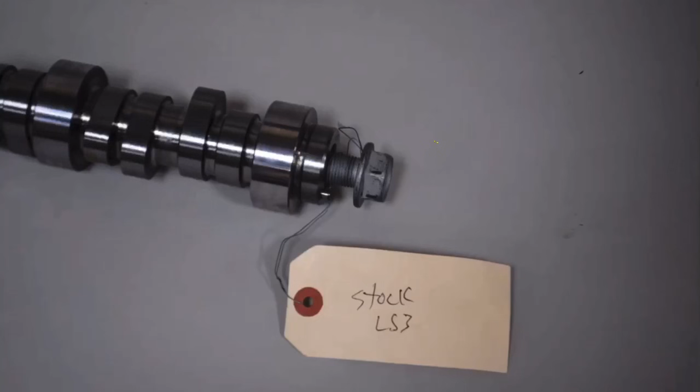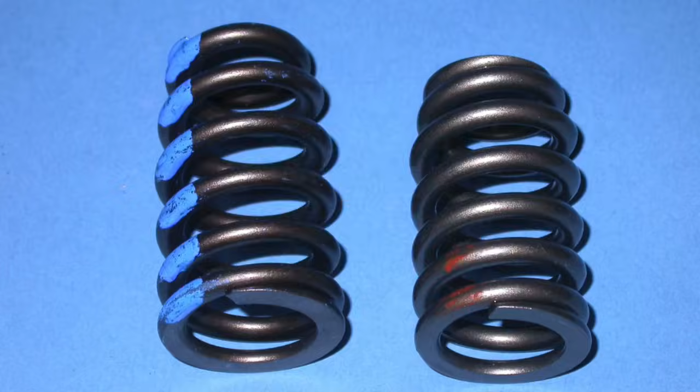Hey guys, Richard Holdener here. Where are my 6-liter fans? What 6-liter guy wants more power? I better see every one of those freaking hands up.

The question is, what camshaft should I use? Should I run a stock cam? Should I run a truck cam? Should I run a sloppy stage 2 or something even bigger? I know, let's ask Richard. He's probably tested it. In this video, I'm going to show you a bunch of different camshafts for your 6-liter

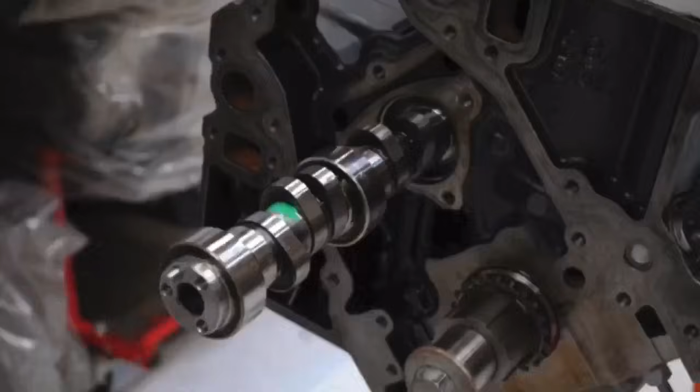so you can pick the best cam. I'm going to show you the stock cam, a bunch of truck cams, a sloppy stage 2 cam, the factory LS3 cam, and then a big comp cam to show you which kind of power curve you want for your 6-liter. But I'm also going to show you graphically from the dyno results why I'm so excited about getting my hands on a Truck Norris cam.

This video does not have that, but I'm going to show you why I'm so excited about that test. I've got some interesting comparisons here between some Brian Tooley stage 1, 2, and 3 truck cams and some factory cams and the sloppy cam and some other performance cams. And this is pretty good information. So let's take a look.

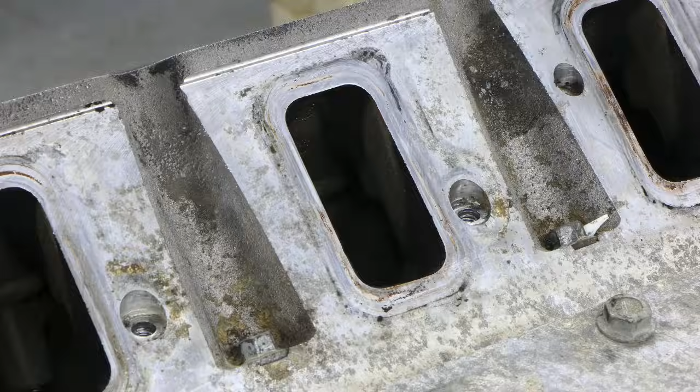We've got our 6-liter LY6, which is a rec port headed LY6. It originally came as a VVT motor, but we replaced that with a fixed 6-liter cam, and it was a later 6-liter, not the LM7 camshaft. We ran it with long tube headers, the Holley HP management system.

We ran it both with the LY6 truck intake manifold and the LS3, and we ran those comparisons of the two intake manifolds with multiple camshafts, and they basically made the same power every time we tested them, which was 4 or 5 different times. And so they made the same power. We ran, obviously, a manual throttle body and not the electronic drive-by-wire stuff.

We put springs on the heads because we would be running multiple camshafts on this thing, so we wanted to make sure we had valve spring to take care of the bigger cams that we would eventually run.

It's also worth noting that the Brian Tooley Racing Stage 1, 2, and 3 truck cams that we tested, these were the version 1, so this was long ago. They also came out later with a version 2, and then now they've even replaced that with a version 3, if you will, and also the Truck Norris cam, which I think would be the best combination of all of these, and I can't wait to actually test that one, but we're going to talk about that later on.

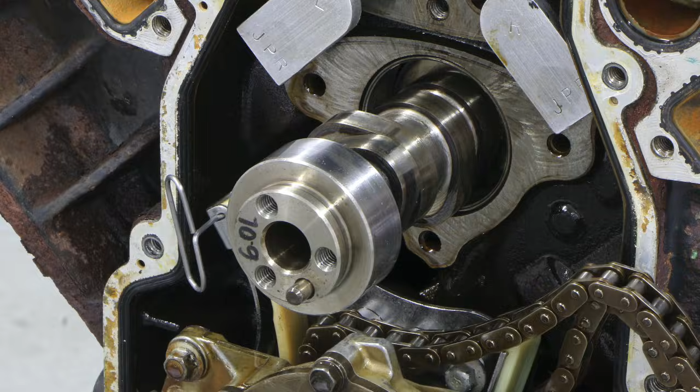Run with our stock 6-liter cam and the long tube headers, and obviously the thing was tuned, our LY6 6-liter produced 443 horsepower and 467 foot-pounds, and here's what happened when we installed our stage 1 truck cam. We picked up pretty good power, went up to 474. Torque was up to 480 foot-pounds.

The interesting thing is I want to show you a comparison between this stage 1 truck cam, which has a 527-535 lift split, a 206-212 degree duration split, and 114 degree lobe separation angle, and the factory LS3 camshaft, which is very, very close in specs. It has a 204-211 degree duration split, 551, so slightly more intake lift, and 525 exhaust lift, and 117 degree lobe separation angle. So let's take a look and see.

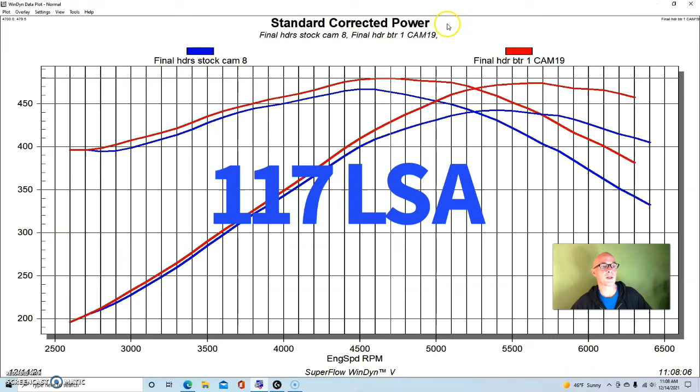So the little truck cam, even though it has similar specs to the factory LS3 cam, a tighter LSA, it makes a lot more average power. And we'll see this if you go up in the truck cams.

The stage 2 is kind of my favorite for this 6-liter combination because it makes almost the same power and torque as the stage 1, but makes a lot more peak power. So it mimics the stage 1 all the way up to 4,200. It ended up making, let's see here, 494 horsepower. Peak torque checked in, and we got a nice, starting to get a nice little torque plateau here.

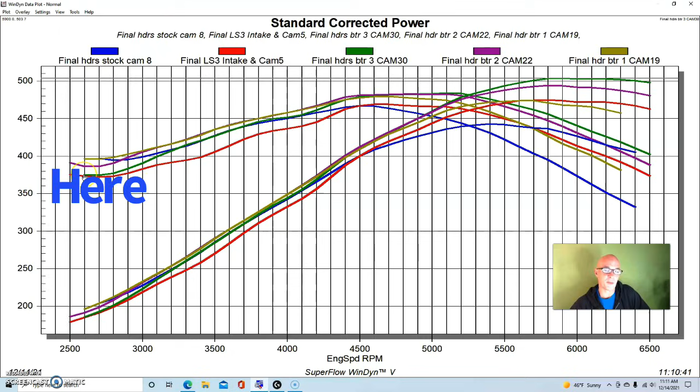It made the most peak power, 504 horsepower, but you can see it's starting to lose torque below 4,400 RPM or so. It's still never down as low as the LS3, except right here at 2,600 RPM. So it would be a better choice than a factory LS3, and it makes a lot more power, basically everywhere. But down low, they're going to kind of make the same power.

And again, these are the version 1 cams. The version 2 were better than these, and the new version is even better, and the Truck Norris cam probably is way better than all of these, I would imagine.

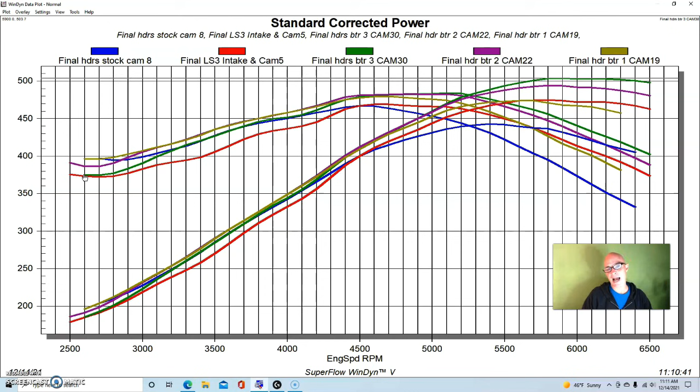So let's take a look now at some bigger cams. Having tested the earlier versions of the truck cam, I'll show you why I'm so excited about testing the Truck Norris cam and even the later versions of these truck cams. So this is our stage 2 truck cam on our 6-liter.

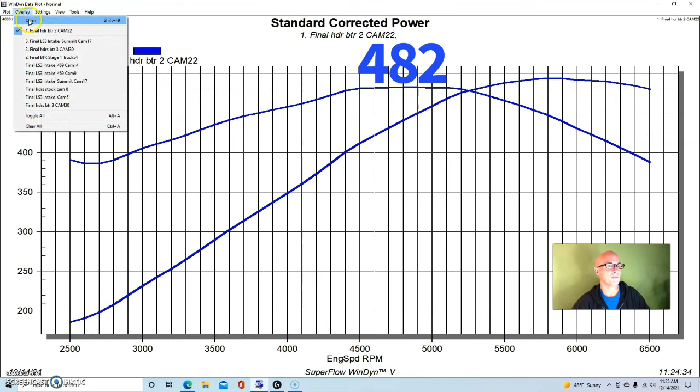We were at 494 horsepower, got a little torque plateau here, 482 foot-pounds. This was our stage 3 - you can see a little bit more peak power, but we traded power down low. And here is Matt Happel's favorite, the famous sloppy stage 2 cam.

And it makes a little bit more peak power. In fact, it makes more peak torque there and kind of shares torque production on the first part of the RPM range with the stage 2.

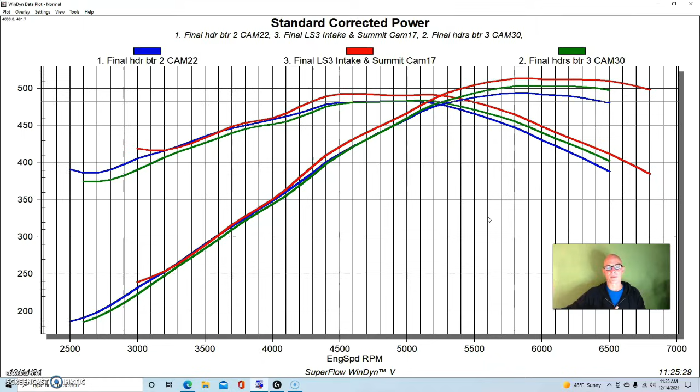And that's exactly why I wanted to test the Truck Norris cam, because remember, these are version 1 truck cams. So there's been a version 2 and a version 3, and now also there's this Truck Norris cam. I already know that the Truck Norris cam, having seen the test stuff that Brian did, is better than the version 3 stuff.

So it's going to make more low-speed power. So what I think will happen when we test the Truck Norris cam - it'll be interesting to compare it to the sloppy stage 2 maybe later on in a test. But what I think will happen is the Truck Norris cam is going to make more low-speed power than any of these. The thing I don't know, and the thing I'm excited about testing, is...

I don't know how much more power and how much more torque it's going to make than this sloppy cam, for instance, on the 6-liter. I don't think, given the specs of this thing - because this sloppy cam is a 228-230, and the Truck Norris cam has much lower duration specs, essentially a smaller cam - I don't know if it will ultimately make the same peak power as the bigger cam.

It'll be interesting to see where the crossover point is. I'm pretty confident it's going to make more power through a lot of the curve. I just don't know where the crossover point is.

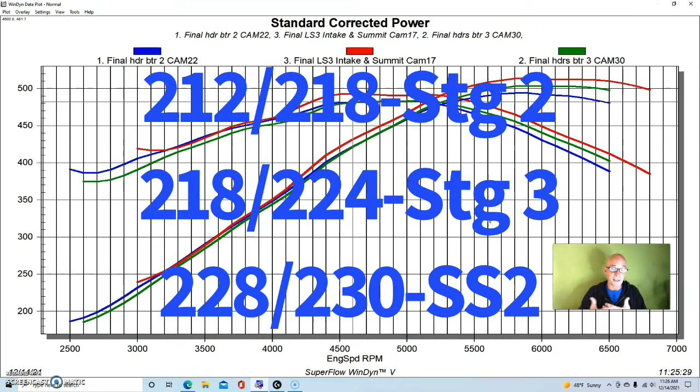I'm going to go ahead and put the specs up here for these different cams so you can see the different lift and duration specs. But the sloppy cam of all of these is definitely the biggest cam compared to the smaller stage 1 or stage 2 and stage 3 truck cams.

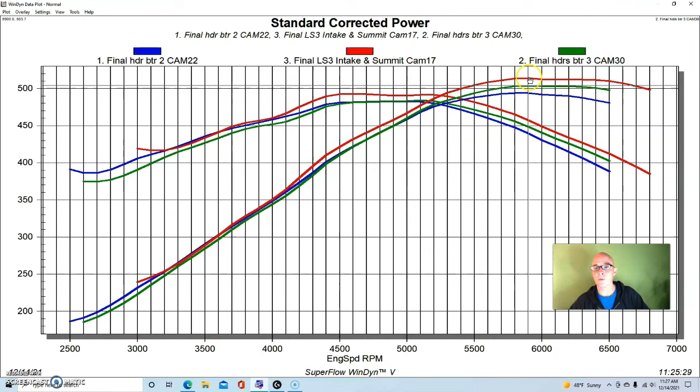But it's interesting that the stage 3 truck cam, even being 10 degrees less duration, 218 versus 228 for the sloppy cam, is within about 10 horsepower, I think. Let's see, we're at 504 versus 514. So yeah, right at about 10 horsepower. I'm pretty confident the new versions of the truck cam have that much more power, and like I said, the Truck Norris cam might be the best of all of those. So it'll be interesting to test.

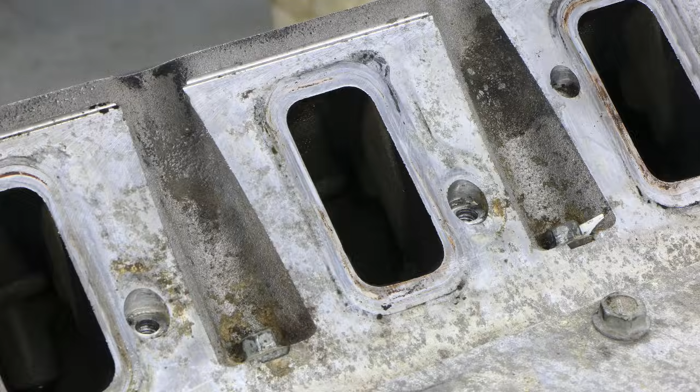But we're here also to take a look at other bigger cams. Since this is a 6-liter, it has lots of head flow. It's got the factory LS3 style rec port heads on it, an LS3 intake manifold, and long tube headers. So what it really needs to make power is more camshaft.

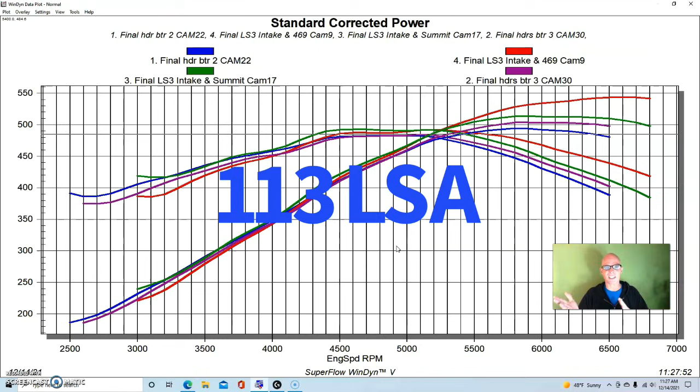Well, here's what happened when we put in the Comp 469 cam. Basically, that's a camshaft with a 231, 247 degree duration split. It's got .617, .624 lift and 113 degree lobe separation angle. But there are lots of cams in that range that are right at the limit of fitting the available piston to valve clearance. So the thing you need to be concerned with is that intake duration number, because that's what's going to hit first - the intake valve is definitely going to hit.

You have a lot of room on the exhaust side, but the intake valve is what gets close. A lot of guys think, well, how much lift can I run? It has nothing to do with the lift, almost nothing to do with the lift.

It's all the duration. Something in the 231, 232, 233, depending on where you put the lobe separation angle. The more you tighten up the LSA, the less piston to valve clearance you have, and the less duration you can run. You can juggle those two figures, but this is what happened when you run a fairly good sized cam that's getting up near the limit of the available piston to valve clearance on a 6-liter that has good head flow. We're looking at 543 horsepower.

So it's about 30 up on the sloppy stage 2, which is a 228 cam.

But it's only better from about 5,000 on up, which is an interesting dilemma for a lot of guys, because if you're drag racing this thing and you're running from 5,000 to 7,000, which would not be an unusual RPM range for you to run your LS in going down the drag strip, the bigger cam is definitely going to win the race. It's going to make more power, more average power in that RPM range, and it's just going to be faster.

But if you look down below that, the smaller 228 sloppy cam actually makes more torque, not by a ton, but by some, compared to the bigger, almost-not-gonna-fit kind of cam. We see a difference of 399 to 420, so 20 to 25 extra foot-pounds down low for the smaller cam.

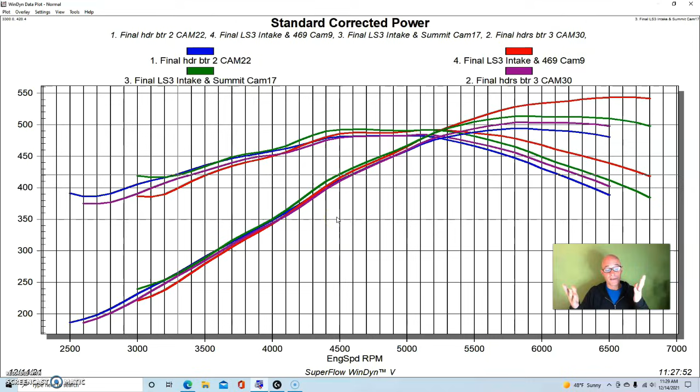And that's something we see a lot. You trade power up top, where you get big power gains on the big cam, you also get a low speed power loss. Let's get to our conclusion.

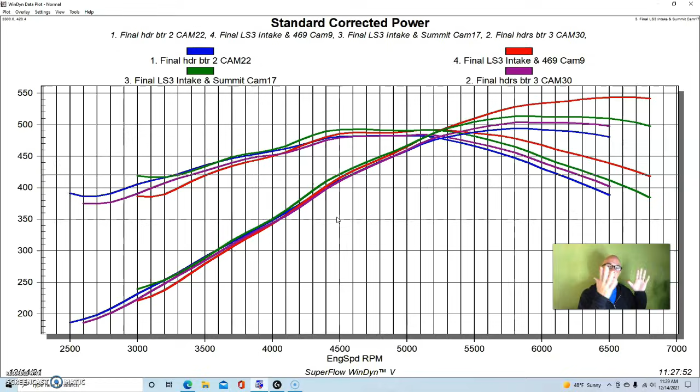Okay, 6 liter guys, there's a lot of good information in this video. Basically, it gives you the range. I'm gonna go ahead and put my corners up here. It gives you a range of camshaft. Let me get my hands in here, right? Oh, there's that one goes out here. So you can have this much, you can have this much. You can have the range of camshaft that you can use in your stock bottom end motor, basically with the available piston to valve clearance.

So we have the big camshaft, and all of the cams that are going to fit are going to be near that lift and duration, and more importantly, the duration, as we've talked about many times. It's really the intake duration that determines how much camshaft you can fit with the available piston to valve clearance. So it's going to be somewhere near that 231, 232, 233, depending on what the lobe separation is.

If you tighten the LSA, you reduce piston to valve clearance. So you have to juggle those two things. There's lots of room with the exhaust duration. So the big cam that you can fit in there, if you have stock piston to valve clearance, is going to be near that. And then the stock cam is on the other end of that.

Now, there are other cams that you could put in to make less power, although I don't know why you would want to do that. So somewhere, all the other cams that you can run on your 6 liter are going to be within that range, and they're all going to make power within that big spread that you saw. They all fit somewhere in the middle.

The interesting thing, and the thing that makes me want to run the Truck Norris cam so bad, are the results we got, especially down low comparing the truck cam to the sloppy stage 2 cam. Those are kind of go-to cams for a lot of guys. Truck cams are very popular, and that sloppy stage 2 is also very popular.